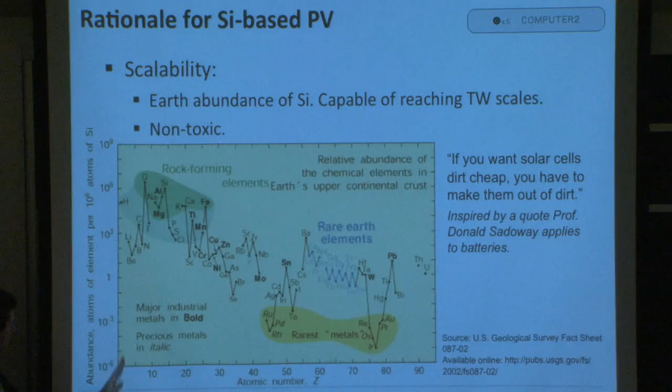One is scalability. If you look at the elemental abundance, this is on the vertical axis, abundance atoms of the element per 10 to the 6 atoms of silicon. The reason everything is normalized to silicon is because there's quite a lot of it in the Earth's crust.

As you can see, it's the second most abundant element in the Earth's crust. It just so happens that out of all the stardust here on the planet, we have a high percentage of silicon, like the moon and many other planets in our solar system, at least the hard ones. Oxygen is the only element with higher natural abundance in the Earth's upper crust than silicon. As we go to higher and higher atomic number, the probability of formation due to subsequent fusion reactions in stars decreases, following almost a power law distribution, as you can see there.

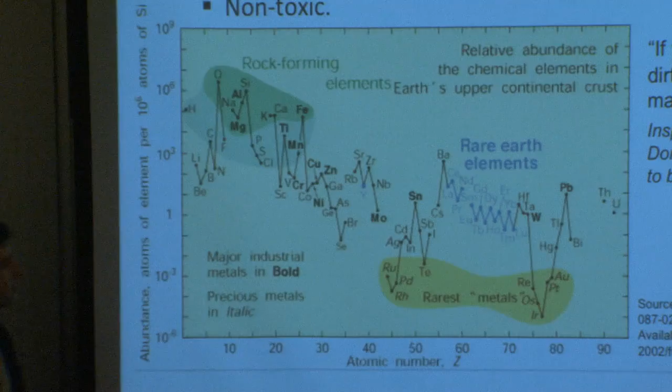So it's scalable. It's present in the Earth in high enough capacity to reach terawatt scales. It's non-toxic. As Don Sadoway likes to say, if you want batteries dirt cheap, you have to make them out of dirt. A similar expression is used in the crystalline silicon community. I believe the quote from 1366 is, 'It's not only good for the planet, it is the planet.'

Variety of riffs off of this particular chart. But from a technological point of view, why did silicon evolve to the point where it is today? It forms a very tenacious surface oxide. If you were to expose a piece of pure silicon to air, the surface oxide that forms is very strong, very resistant, and very dense.

Unlike some materials that corrode when exposed to atmosphere, silicon oxidizes maybe the first few tens or hundreds of angstroms, and then it peters out. It's a diffusion-limited oxide growth mechanism that eventually stabilizes at a very thin but very dense and very protective oxide layer. So the risk of a silicon wafer degrading inside a solar module is very low.

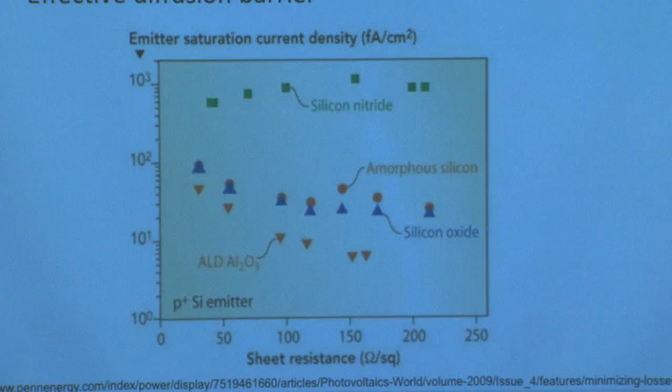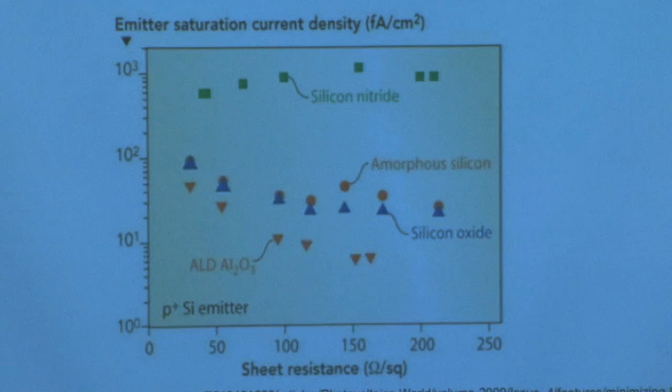That oxide layer, from an electrical point of view, is very passivating. As we studied, those interface states, those surface states at the surface of a semiconductor, can be reduced or minimized by the presence of certain passivating layers. It just so happens that by the benevolence of nature, silicon oxide, shown in these blue triangles, has a very low surface recombination velocity, passivates the surface very well, and results in high-performing devices. In this particular case, they're plotting emitter saturation current density in femtoamps per centimeter squared, which is very low, versus sheet resistance—essentially the dopant concentration in the emitter.

So they're looking at how the passivation quality changes as a function of dopant density. Silicon oxide works pretty well, and it's an effective diffusion barrier. And probably most significantly, those are maybe a looking-forward rationale, one technological or scientific rationale.

As far as the field is concerned, as far as the engineering community is concerned, silicon has a lot of momentum. It's the most common semiconductor material. Silicon and germanium were both purified more or less around the same decades, but because silicon has a wider band gap, you have lower thermal carrier concentration, lower intrinsic carrier concentration. Folks were able to make transistors and devices with lower noise out of silicon as opposed to germanium, and silicon technology really took off. In terms of the PV industry, it benefited a lot by that cross-pollination—many technologies came in from the integrated circuits industry to assist or give a boost to the PV industry.

This number is a little outdated. It's now about $100 billion. Hard to keep up with things growing at 68% a year.

Technology acceptance results in lower interest rates. So if you have a technology that is well accepted by the market, you go to a bank and say, hey, I want to install some of those things. And the bank says, what are those things? You say, oh, hundreds of thousands of them have been installed already. It's okay, it's a proven technology. The bank says, okay, I'll lower your interest rate. That means you pay less money on interest, your capital is cheaper, it works better in your favor. And the opposite is true with an entirely new technology that's unproven.

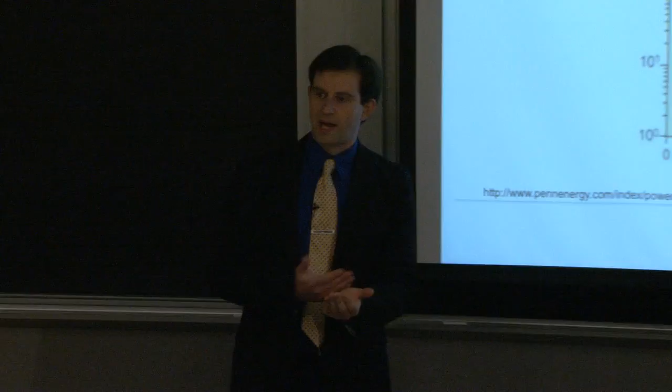So that's really summing up why silicon: momentum, forward motion if you will, some inherent intrinsic technological advantages, some of which are listed here, and scalability. To get back to the technological advantages, it's important to recognize what they are so that when you're thinking of a new material, you can cross-check and say, do I have these or not? If I don't have them, it's not the end of the world—you might have other advantages that overcome the ones silicon doesn't have. Let's add some more into this list.

Just stream of consciousness: silicon has a very high refractive index near the band gap edge. So near the band gap edge, it's absorbing light less efficiently—it has a larger attenuation length of the light, a smaller optical absorption coefficient as you approach the band gap. So silicon absorbs poorly in the infrared because it's an indirect band gap semiconductor, but it also has a very large real component of the refractive index. Does anybody remember what that refers to? Real component of refractive index from lesson number 2—what does that dictate?

Reflection, exactly. So if I were to tailor an index of refraction grading on the front side of my device, I allow the light to be absorbed efficiently; on the back side, I can put a very large index of refraction mismatch so that the light bounces back. In other words, light trapping in silicon is benefited by the fact that you have this awesome reflection capability. The refractive index is around 3.6, the real component, in the infrared at around 1070 nanometers. Which means that if you design your cell right, you can get an extension of the optical path length by a factor of 50 over the thickness. So if your thickness of the device is D, the optical path length can be increased up to about 50D, and that's a result of this great reflectance.

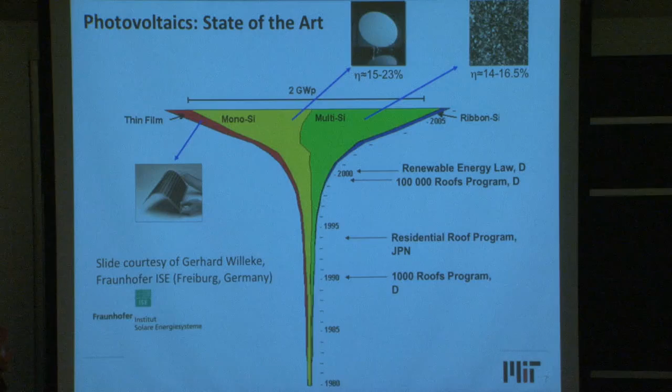In the earlier days, let's pick 1985, the market was split about a third between thin films (amorphous silicon), monocrystalline silicon, and a material called multicrystalline silicon. Now let's go piece by piece. What is monocrystalline silicon, multicrystalline silicon, and thin films?

Thin films are materials usually between a few hundred nanometers up to about 3, maybe 5 microns thick. To give you a size perspective, your hair is about 50 microns in diameter, so we're talking about 1/50th the width of your hair. That's the active absorber layer.

And of course, the plastics and encapsulants and everything else that go around them make it a bit thicker. But the absorber layer is very thin, so you're not spending much on it. It absorbs light very efficiently, has a very large absorption coefficient, and is able to absorb photons efficiently.

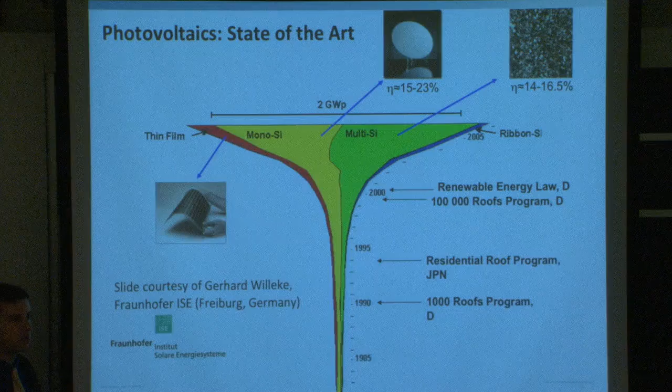Crystalline silicon, on the other hand, does not absorb light as well as many thin film materials, so we need about 1 to 2 orders of magnitude thicker substrates. Crystalline silicon substrates today in commercial manufacturing are typically between 160 to 190 microns, with an average around 170, 180 — about 4 times the thickness of your hair.

Monocrystalline silicon and multi — let's talk about the difference. Folks are probably familiar seeing pictures, at least something like this. This right here is an example of a Czochralski silicon wafer, used or appropriate for integrated circuit work. I'll pass this around so folks can get a sense — this is an example of a monocrystalline silicon wafer for the integrated circuits industry.

Let's analyze it in a little more detail. The front side surface is polished — nicely polished, to somewhere in the order of a few nanometers mean surface roughness, using a chemical mechanical polishing mechanism. The thickness is around 700 or 675 microns, somewhere in that range.

It's a very, very thick wafer. The objective is not to break it. If you're making an integrated circuit, this entire wafer could be worth a few tens or hundreds of thousands of dollars by the end of the processing sequence, so if one of these breaks, that's an awful lot of revenue the company is losing.

So the substrate is thick because they don't want it to break. Silicon is brittle at room temperature. If you were to manufacture a solar cell out of this, you could, but it'd be very expensive.

The chemical mechanical polishing used to flatten the surface costs a lot of money and is very time intensive. The thickness of the silicon is above and beyond what is necessary to absorb light well. If anything, increasing the thickness just increases your emitter saturation current, since you have a higher recombination current driven by bulk recombination. You have more recombination centers because of the greater thickness, and it drives a larger diffusion current from the emitter into the base. So making it this thick really doesn't make much sense.

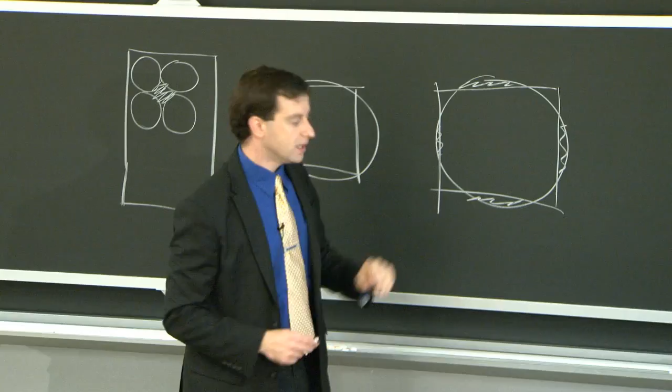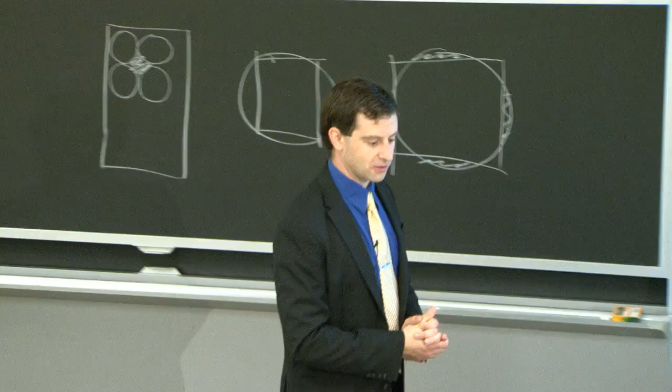So the idea is to cut it out of the same ingot as that one right there, but make it thinner, on the order of 170 microns thick, and chop off part of the edge. How much you chop off depends on the dynamic pricing of silicon versus module materials and installation, and whether you can sell the module if there's a certain threshold of performance it needs to reach. Because obviously, if you have a bunch of dead space in here, you're not producing power out of that. So if somebody wants a module that's more efficient, you might want to increase the packing density.

So that's monocrystalline silicon. Multicrystalline silicon—let's put it this way for now. We'll describe how multicrystalline silicon is made. But for now, I'm going to say that multicrystalline silicon is a crystalline silicon variety that is comprised of many small grains.

So if you look at a multicrystalline silicon wafer, something like this—let's say this is a perfect example right here—if you look at a multicrystalline silicon wafer, you can see it looks nice here, maybe. That's probably an OK view of it. You can see individual grains if you look closely at it, and those are grains of crystalline material that are joined by grain boundaries.

So the grain orientation in one region might be pointing in this direction, while the grain orientation in the neighboring region points like that, and they come together at a grain boundary. When we have polycrystalline materials like this, it's generally indicative of some faster growth that didn't allow for a nice homogeneous single crystal material to evolve. And that's indeed what happens during the multicrystalline silicon ingot growth—it occurs under a slightly modified growth condition than, say, that beautiful single crystalline piece over there.

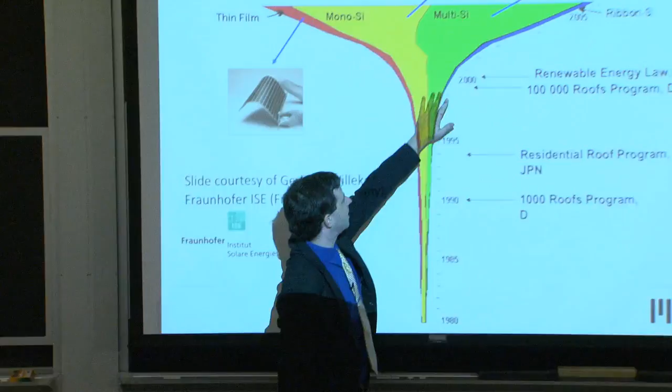And we'll explain how those are made in a second. So those are the technologies in general, the base absorber materials. Then there's ribbon silicon, which is a really small fraction of total production and decreasing. But at one time, ribbon silicon was viewed as the up-and-coming technology. Still today, there are about 20 startup companies in the US working on some aspect of this, and probably a dozen more around the world.

I had a question about multi. I've heard of multi and micro and poly - are they just different grain sizes? Sort of. Multicrystalline silicon is a polycrystalline silicon material. The definition is that the average grain size is about 1 centimeter squared or larger, and that's where multicrystalline came about. Polycrystalline silicon in the silicon community has a very specific meaning - usually a plasma-enhanced chemical vapor deposited layer of silicon with 1 to 5 micron diameter grains, so very small grained material, about 1/50th to 1/10th the width of your hair. To distinguish it from that poorly-performing small grained material, one calls this multicrystalline silicon.

Is there microcrystalline? There is also microcrystalline silicon, and it's actually at the phase transition between amorphous and polycrystalline silicon. As you go from an amorphous material, increasing the temperature of growth or other parameters during deposition, as you begin to evolve into a crystalline material, you transition through this microcrystalline regime, which is a bit of a hybrid, with some regions amorphous and other regions crystalline.

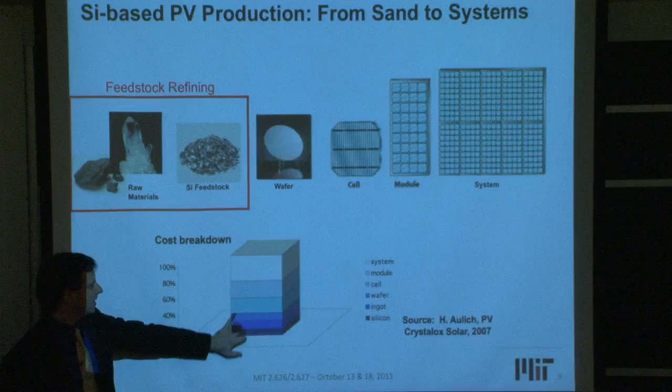OK, let's talk about feedstock refining. We're going to start the silicon value chain from the raw materials and work our way all the way to the final module. We'll start with the feedstocks themselves. Down here is a rough cost breakdown - think of wafer, cell, module as being like a third of the total module cost, with balance of system components beyond that. So we'll start from our feedstocks and raw materials in the ground, wind up with systems on the roof, and walk through each step of the current manufacturing process.

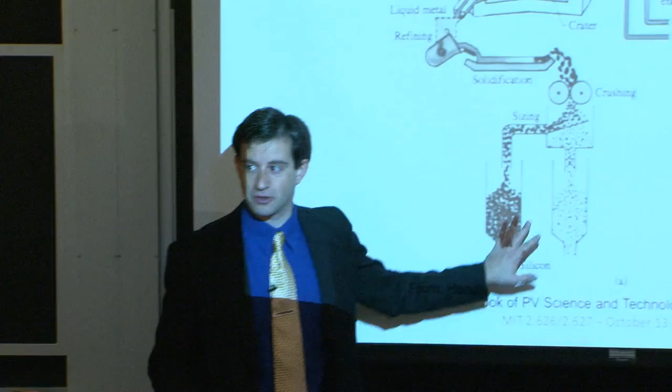So raw materials - shown here is quartz and coal for a very good reason. The way feedstock refining occurs at the first stage is to take oxidized silicon, silicon dioxide, quartz, and reduce it to silicon - silicon zero, unoxidized silicon, also called silicon metal. It's called a metal because it's very low resistivity, which is because it has a very high impurity content still. The purity of this material is around 99.9% pure. That sounds high, but in terms of parts per million of impurities, we have further refining steps to do after this.

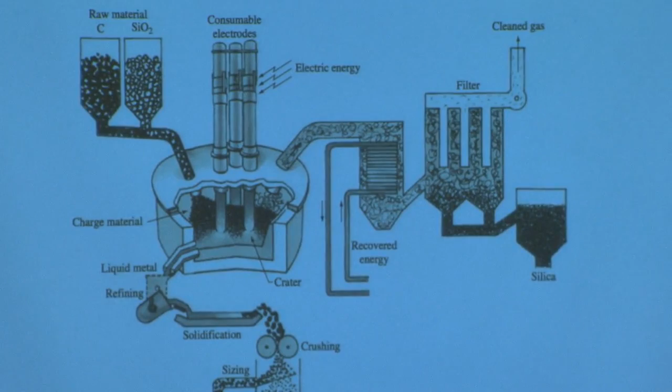So let's walk through this. We start with the raw materials in the upper left - raw material inputs, carbon and SiO2. The SiO2 form is usually quartz, which could be high purity pegmatite, or hydrothermal quartz, higher purity varieties of quartz. You could even use a metamorphic quartzite material.

Let me explain. Some of the highest purity materials come from veins of magma that flowed up and then phase separated during millennia. Some of the lowest purity quartz comes from sand - essentially crushed rock that made its way into a beach-like environment, and then rock was deposited on top of that as pressure was increased.

And this whole mixture of mica, feldspar, and quartz got pushed together and formed a solid block. That would be your metamorphic quartz material. And so you'd have a much higher impurity content in the metamorphic quartz than you would in, say, a high purity pegmatite or hydrothermal quartz.

Regardless, depending on the feedstock source of the quartz, there are people who study this, believe it or not. There are entire departments dedicated to mining quartz and figuring out where the different veins of the highest purity quartz are, where you get them from.

That's the SiO2 input. And the C input over here on the left-hand side, carbon. So typically what is used in the PV industry is either a fast-growing wood source, like eucalyptus or southern pine. Northern pine tends to be slower growing, but eucalyptus and southern pine both tend to be fairly fast growing. You can tell by the spacing in the rings if you chop the tree down and do a cross-section. Or coal, so carbon, essentially.

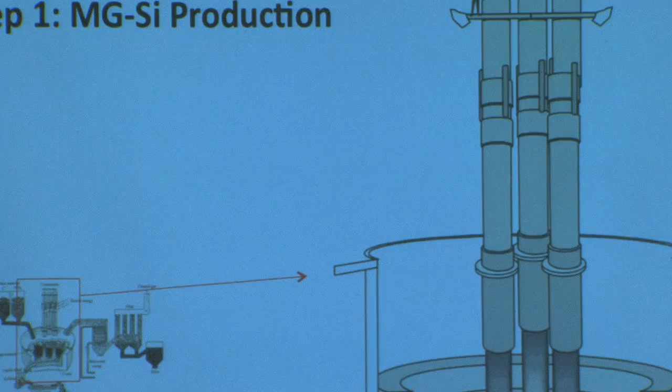And the two react inside of this furnace right here. And this furnace, just to give you a sense of scale, here's a human being. This is the furnace. It's just about 5 stories tall, 12 meters in diameter. It's a big creature. This furnace right here is what is producing the reduced silicon.

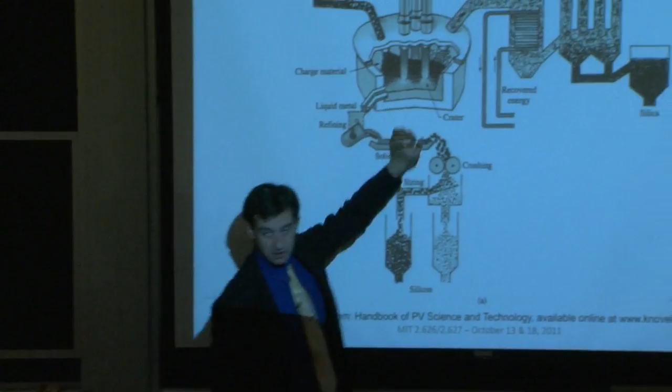What's happening is these feedstock chunks are being thrown in at the top, and there's an arc going between the electrodes, usually some carbon-bearing material, and a base contact. That arc creates a very high temperature, something on the order of up to 2,000 degrees Celsius near the arc. And the temperature decreases as you go further away. Up near the top, it might be even below the melting temperature of silicon, somewhere around 1,200 degrees.

So this is an extremely inhomogeneous, messy system, this metallurgical grade silicon refining furnace, this arc furnace, also called a carbothermic reduction furnace. Very busy place, lots going on, extremely inhomogeneous if you were to take a cross section, also in terms of temperature and in terms of the chemical states of the different constituent species.

But the general reaction that happens is the carbon would much rather bond to the oxygen than silicon. And so the carbon steals the oxygen from the silicon and reduces the silicon to silicon metal. And CO2 is released. We'll get to that in a second. Flag that, put an asterisk next to it. We'll come back to that in a sec.

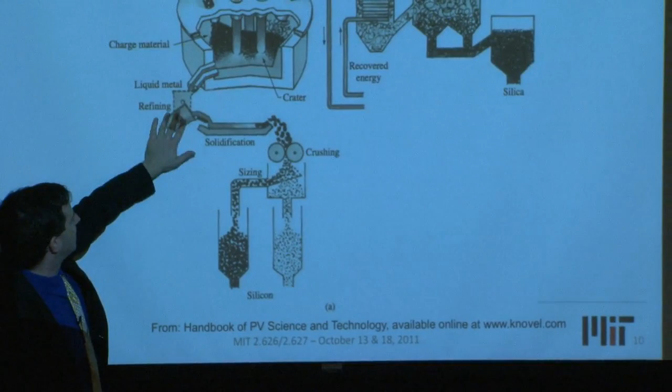Other byproducts of this reaction — this is the liquid silicon metal coming out here at the bottom. It's essentially liquid molten silicon. Reduced, so silicon zero, not a silicon oxide. Reduced silicon metal. And then finally it's poured into these buckets, also called ladles, and solidified, crushed up to size, and then distributed at the end.

Other byproducts coming out of this reaction include this liquid silicon up here. It's very high temperature, and there are gases and a lot of oxygen because of the reduction process. So silica, or SiO gas, can be produced. And silica gas can begin aggregating and forming very small particles, almost like shards of silicon oxide material. These can be on the order of 1 to 5 microns and very rough and jaggedy around the edges.

Now, who here has studied public health and knows anything about PM1 or PM1.5 denominations? Do they ring a bell? What are those, Ashley? It's the size of particles that can get stuck in your lungs.

Exactly, right. So PM1 or PM1.5 would refer to the micron diameter, 1 or 1.5 micron diameter particle that would get stuck in the alveoli and result eventually in edema, or probably more of water filling up in the lungs as a result of the body trying to expunge these. And because they're jaggedy and pointy, they get stuck in there and they don't come out. Eventually people can even asphyxiate as a result.

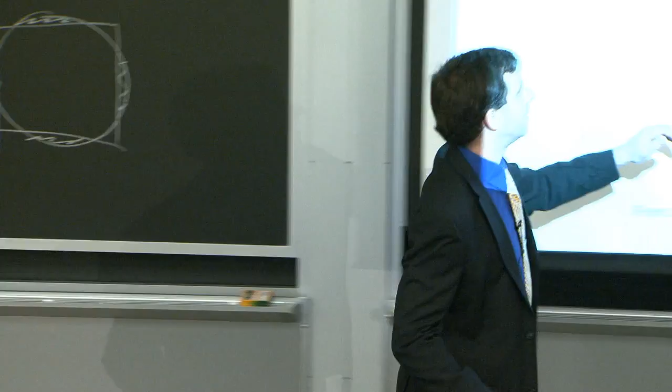So in the past, when we had these big smokestacks sticking on top of these metallurgical grade silicon refineries that would just spew the silica dust into the air, the folks downstream would be affected. This actually did happen to some degree in, for example, Kristiansand in Norway. As a result, the refineries began putting in filters over here to prevent the silica dust from getting thrown and spewed out into the atmosphere.

And the filters are a very interesting contraption. A lot of work went into designing them just right to allow the air to go out, but the particulate matter to stay behind.

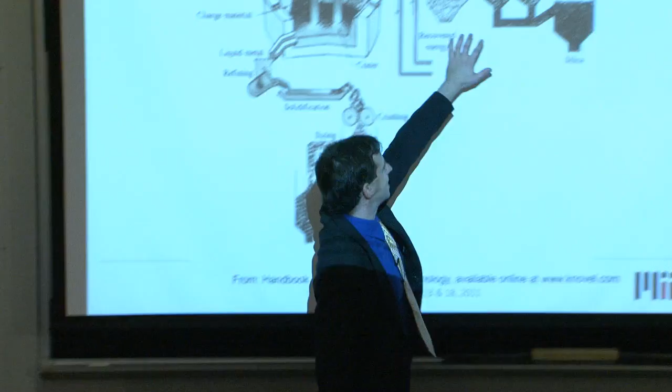And once every delta T, maybe on the order of an hour or so, the airflow direction inverts, and all of the dust comes crashing down to the bottom and gets collected inside of here. It's kind of like pushing air through a sock in the opposite direction, and all the dust comes out through the bottom. You collect it, and it's sold.

It might be used for absorbing in the footwear industry, I don't know, but I know that the majority goes to the cement industry. So depending on the market rates of silicon here at the bottom, metallurgical grade silicon, versus what the cement industry is willing to pay, you might tune your process to optimize for one industry or another.

So this is to say that early on in refining processes, you're serving multiple industries with one plant, and volatility of pricing is affected in part by what those other industries are doing, what the demand there is. Something to be aware of.

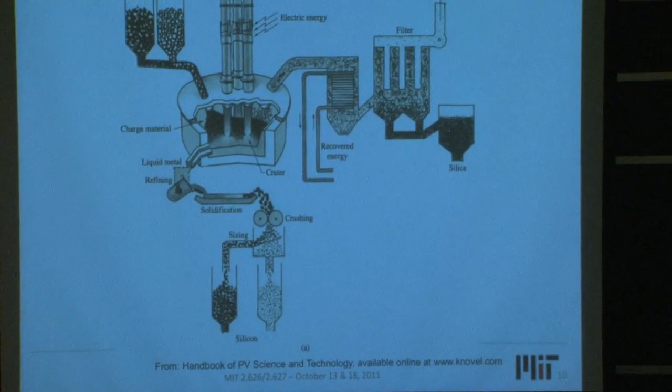Let's come back to the CO2 real quick that's being emitted. That's one of the byproducts of the reaction. In terms of total CO2 content from production of solar cells, the CO2 produced during the reduction process is a small percentage - I think something under 5 or 10%, the number I pull out of my head.

It's a small percentage of the total CO2 emitted during solar cell manufacturing because the electricity that goes into producing the rest of the solar cells, coming from fossil fuel-based sources, comprises the majority of CO2 emissions during fabrication of these devices. The electricity used to run these electrodes, for instance, to melt this silicon byproduct or to gasify it in the subsequent reactions - that is the majority of the CO2 coming out of the process.

Any questions so far about this? They're fun plants to see. We don't have too many of them in the US.

Majority of these carbothermic reduction furnaces are either in China or Norway. Norway has a lot of cheap hydropower, so the hydro plant is usually only a few tens of kilometers away from the refinery. If you go to, say, Porsgrunn in Norway, where they have a number of these plants, you'll see not only silicon being refined there, but also magnesium, other elements, aluminum being smelted in the same peninsula, the same industrial park.

China, you said? The reduction process, this carbothermic reduction process, the majority of it happens, say, in places like Norway or China - places that have cheap electricity.

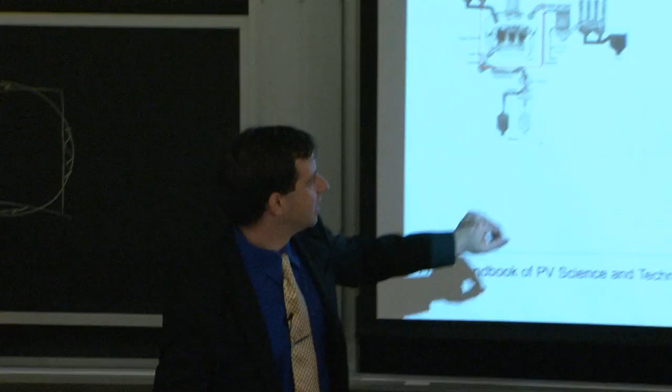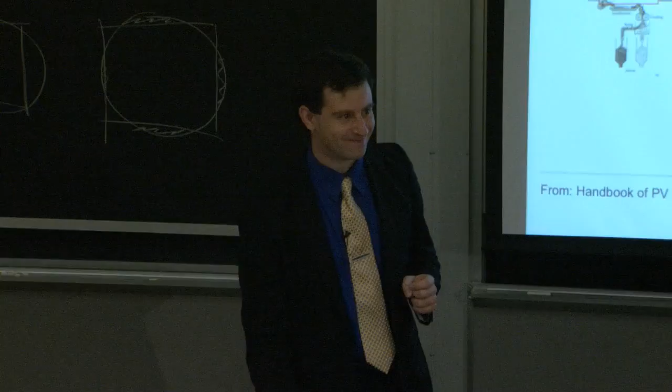We know the energy intensity of the solar panel itself, but specifically what fraction comes from the MGSI refining, I'd rather not pull something out of my head. Any other questions? OK.

So somewhere in the order of 2 million metric tons of metallurgical grade silicon are produced annually. Probably somewhere in the order of 10% of that is destined for the PV industry. The remainder gets split among a variety of different industries. So what I'm talking about here when I say metallurgical grade silicon, I'm referring to this stuff coming out - it has about 99 or 99.9% purity, and it gets used in a variety of industries.

So those industries are the PV industry, and we'll explain how the rest of the refining happens, and the integrated circuits industry - that's the wafer that just went around. It's made its way back up here.

A pet peeve of mine is hearing silicon and silicone used interchangeably. Silicon is an element on the periodic table, the element that comprises this wafer. Silicone, on the other hand, isn't exactly organometallic, since silicon isn't a metal, but it's a molecule comprised of carbon atoms and silicon, with silicon in the middle and carbon on the sides. That's used as a caulking or sealing agent in showers or in plumbing around windows. It tends to be very flexible, compliant, yet impermeable, preventing the inflow of gases.

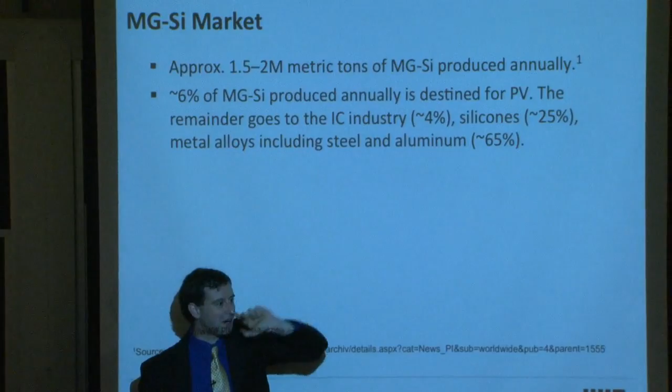So silicones there. Metal alloys, including steel and aluminum - why would you use silicon there? Has anyone played with pure aluminum? Highly refined, ultra-high purity, say 5 nines or 6 nines? It's really flexible - you can dent it with your fingernail, and it wouldn't make very great boxes. So we need it to be stronger and scratch resistant. We add additives into the aluminum, silicon being one of them, that increase the strength of the aluminum, essentially preventing plasticity or dislocation flow into the material. That's more or less how metallurgical grade silicon, also called MGSI, as shown at the top, is distributed worldwide, and that's the current production.

Now let me ask another question. Steel and aluminum - where are those used the most? What industry uses steel and aluminum the most? Construction industry, automotive industry. How fast are those growing annually? Let's estimate it from worldwide GDP growth. US is around 1%, China 8%. Let's pick a number in between, say 4 or 5% worldwide.

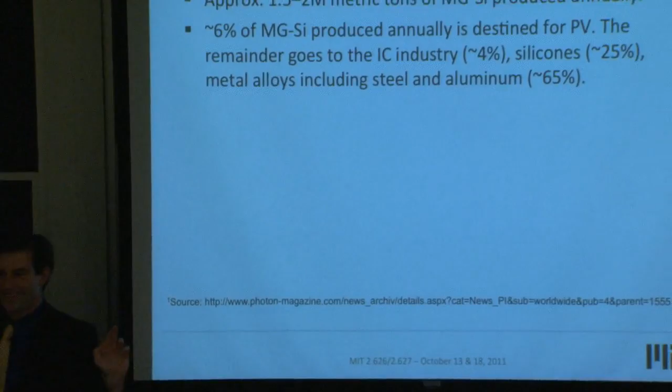Silicone's probably on that order. How about the PV industry - how fast is it growing right now? It's a volatile year right now, but historically it's been around 40 to 60% a year. So where do you think the price pressure on metallurgical grade silicon is going to come from? It's going to come from PV. It's a small fraction of the pie right now, but it's growing fast. Something to keep in mind.

So let me talk about going from metallurgical grade silicon, about 2 nines to 3 nines pure - 2 nines meaning 99%, 3 nines meaning 99.9% pure - to silicon that we can use for solar cells, which typically has to be about 6 nines pure. This is called the Siemens process, purification through gaseous distillation, and that's the method currently used to make most of our silicon.

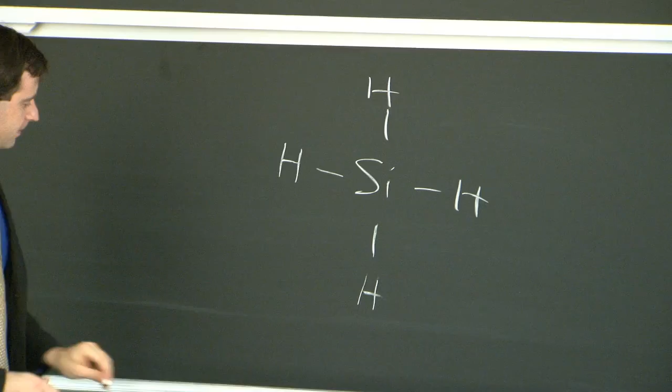Most of the silane is used for polysilicon. The gas has to be converted back into a solid, and that's where the Siemens process is used. You have a current passing through some seed material, and the gas is cracked onto that seed. You form these rods, which are then cracked into chunks, and the chunks are loaded into ingot crucibles.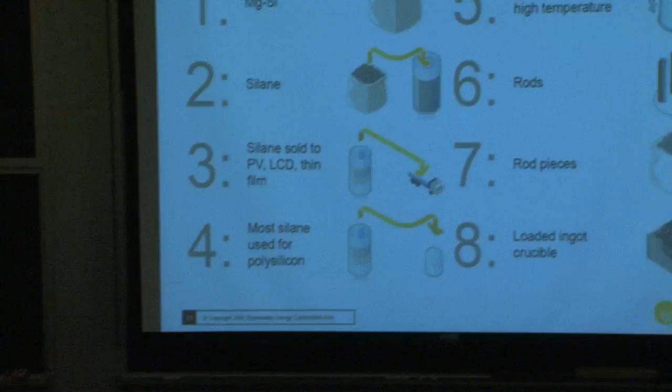So the silane gas is shipped as a gas in trucks? Sure. Or on rails?

It's pyrophoric, as you could guess from just glancing at this chemical structure. It's highly reactive. Pyrophoric means it can combust at room temperature, it can catch on fire, meaning there are more stable compounds that can form when you react this gas with air. During the early days of silane development, folks didn't know much about it.

Some of the earliest research was done here at MIT. They would fill an evacuated chamber with silane gas and spark it, and nothing would happen. Spark a second time, nothing. Spark a third time, boom. They'd say, okay, that's the critical limit, such and such amount. They'd keep increasing the amount until it went boom. So they'd repeat the experiment, since they're good scientists. They'd repeat it, and at low concentrations, click, boom. Huh, that's strange, that was much lower this time. Let's repeat it one more time: click, click, click, click, click, click, click, click, click, boom.

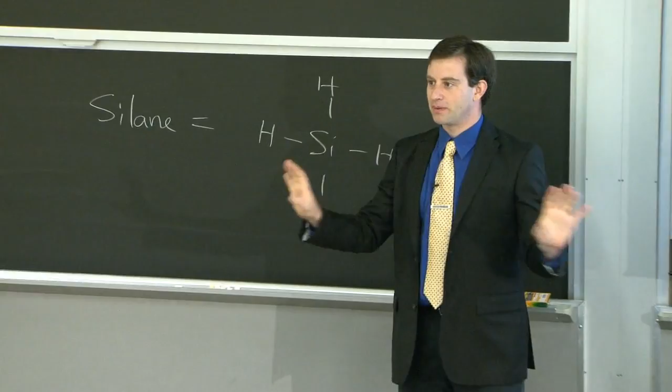All right, we don't really understand this gas, but we're going to say it's really dangerous. So we're going to have little warning bells that detect the silane gas if it's leaking, and tell people to get out of the building if it starts leaking.

It's also toxic for humans, by the way. Very small, dilute concentrations can kill you. So only 3 buildings on campus, to my knowledge, are set up with the proper safety equipment to use silane gas in the laboratory: building 13, which is the material science building, and then MTL and related.

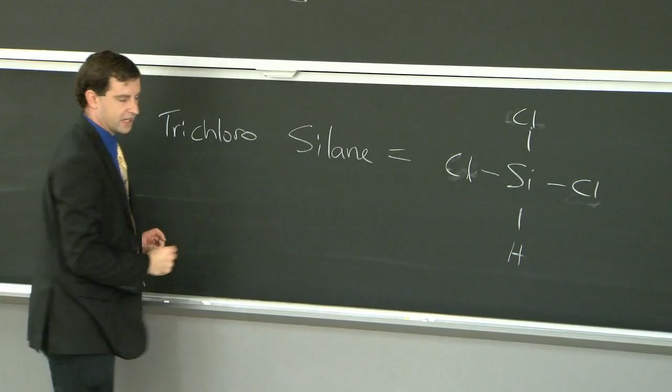So we have this gas, extremely pyrophoric. There are variants thereof. You can replace some of the hydrogens with chlorine, like this, and now you have trichlorosilane, all one word. I've just replaced 3 of my hydrogens with chlorine, and now I have a different molecule, still silicon-bearing, still very reactive, but now reactive at different temperatures. I can modify my process by substituting out some of the hydrogens for chlorines.

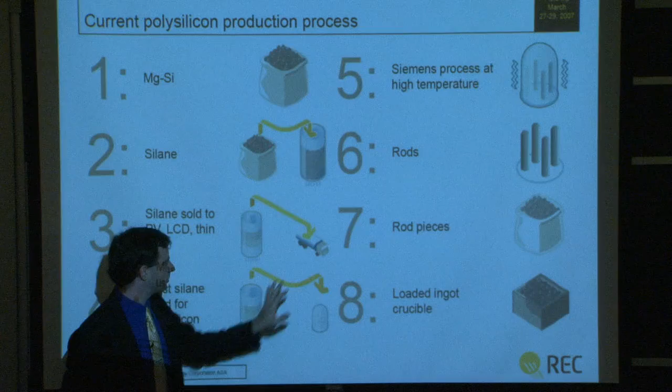So we have the silane gas, or trichlorosilane, or the variants thereof, loaded onto some transportation vehicle that is very safe, leak-proof, and preventing accidents on the road, to deliver it to where it is going to be consumed, which are these so-called polysilicon or Siemens reactors, as shown here. Let me go back one step. We're going to start from the very top of the process and move all the way down, showing you what the manufacturing equipment looks like at each step.

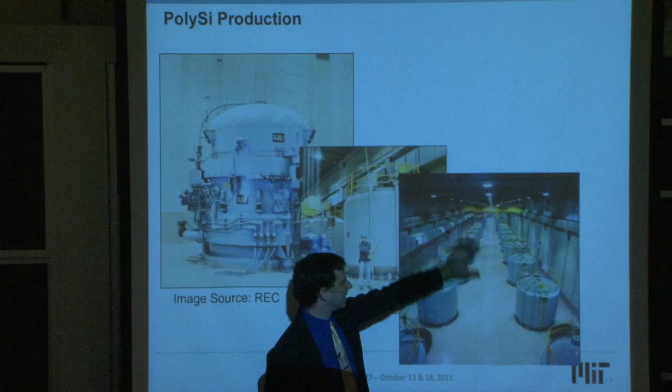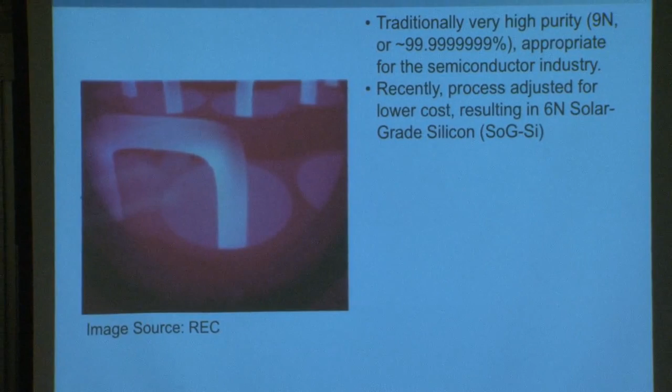The polysilicon production, this is a Siemens reactor. It's much smaller in comparison to the metallurgical grade silicon furnace, much smaller than the carbothermic reduction furnace. Here we have a small human next to the small contraption, and here's a series of them lined up, almost like little pods. Inside the furnace, you have these rods passing current and heating up, and the silicon is cracking onto the rods. So we wind up with 6 9s, usually called 6N solar grade silicon, as a result of this process. We could also go up to even 9 9s using the Siemens process. It can be very, very pure, depending on how fast you grow, and what the purity of your silane gas is.

What is cracking? Like, what does that mean? So what it means is this gas molecule comes in, sees a solid surface. The central atom, the silicon atom, gets deposited onto the surface, becomes an adatom, which means it's a surface atom, it's scuttling around. And the remaining elements within this molecule are then free to move away as a gas.

So you've broken those bonds. Yes, effectively you've added the core constituent of this molecule onto the surface. It's joined the collective, if you will. And in this manner, the diameter of those rods grows with time.

So what I'm going to do is pass around an example of a chunk coming from this Siemens rod. Be very gentle with it, please.

On the outside, you can see a corrugated, rough, cauliflower-like structure. That's because you're optimizing for deposition speed, not for beauty of the surface. You don't really care how flat it is, unless you're trying to grow a very specific type of material called float zone, which we'll get to in a second.

But in general, if you're just trying to crack it up and break it into a smaller piece, a chunk like this, and throw it into a big ingot furnace, it doesn't really matter what the surface looks like. On the inside, it's pretty dense silicon. And if you look very carefully, right in the middle, you can see the rod, the initial seeding rod. It's a slightly different color. So I'll pass these around, please be gentle.

One of the biggest issues with this feedstock refining process is that there are very large plants and long lead times. This is a plant construction going on right now, you can see. Typical lead times are between 18 and 24 months. That's a long time between when the board says, yes, we will create new silicon refining capacity, and product starts to roll off the production line into customers' hands. It's a long time. And what this results in are drastic oversupply and undersupply conditions in the market.

So the silicon feedstock price goes very high during periods of undersupply and very low in periods of oversupply. And we're in an oversupply condition right now. Let me quantify this. 5 years ago, maybe 4 years ago, if you went to the spot market, you could pay $100 to $500 per kilogram of silicon.

That material that was just right there, I bet one of you would put it into your bag and run away out the door right now and be able to go to Mexico. Now, the polysilicon prices are much, much lower in the spot market, somewhere in the order of $30 to $50 per kilogram, about an order of magnitude lower.

Isn't lower cost silicon better for the PV industry though? As a customer, most definitely it is good for you. As an installer, it is most definitely good for you. As a polysilicon producer who wants to be a sustained industry presence, it's not good for you. So this wide oscillation between fat cat and scrawny is not very good for any industry. It's unpredictable and it causes some players to drop out.

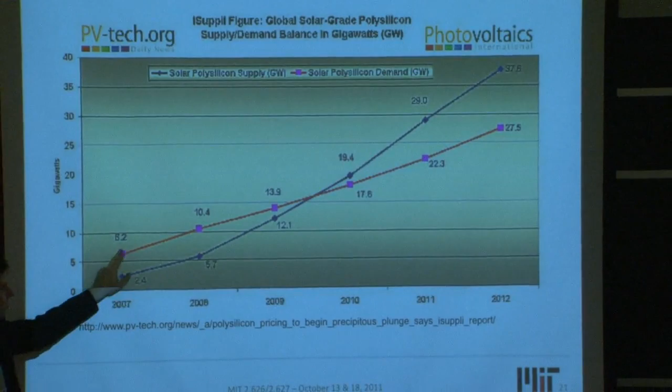Here's supply and demand, demand being the red, the supply being the blue. You can see how the undersupply condition of the mid-2000s really led to our current condition.

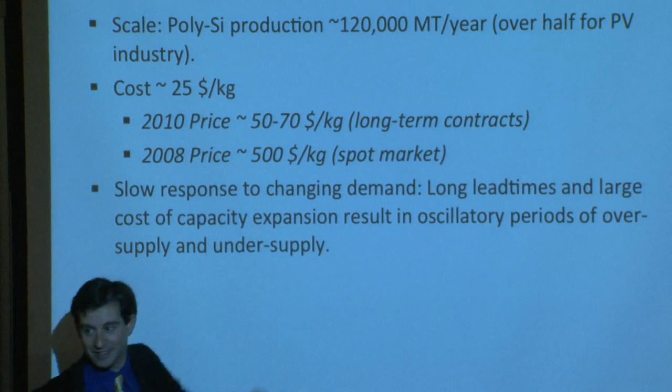So, fluidized bed reactor and upgraded metallurgical grade silicon. Let's talk about each of those in turn.

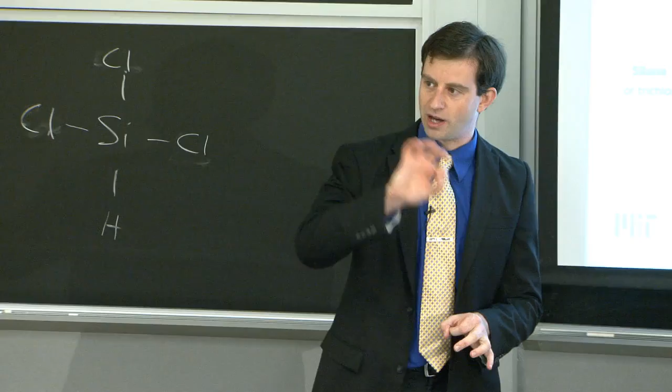What the fluidized bed reactor folks realized was, if we're depositing on a rod, our surface area to volume ratio is going to be very small. Think of it this way: if we had a sphere, that would be the quintessential example where you'd have a very large surface area to volume ratio. If we had a plate, we would also have a very large surface area to volume ratio. In the prior condition, with the rod, you really can't deposit that quickly. So what these folks decided was, we're going to introduce small silicon granules into this vessel, into this evacuated chamber.

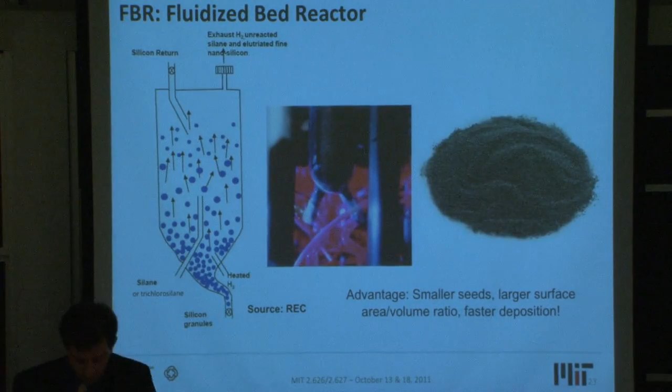Here's the evacuated chamber right here. We're going to flow silane gas into the system. The smaller particles are going to go higher up because of this flow of gas coming from the bottom, and those will grow and eventually settle down here where we can extract them from the bottom. And so we'll wind up with these beautiful little silicon granules.

These ones shown right here, which I'll pass around as well, are coming from a fluidized bed reactor. They're nice, beautiful, spherical granules that are grown a lot faster, with a lot more silicon deposited per unit time than through the Siemens process shown there in the back. As a result, the energy intensity is lower and the cost is lower. But it's a very tricky process to nail, to get just right, because you have to get the gas flows right, design the chamber well, and reduce impurity contents. It's a tricky process, and this is being produced right now by only a few companies.

REC has the capability of doing it. MEMC also has the capability of doing this process. By and large, most silicon is coming from the Siemens process still. Both of those companies have the normal refining process too, and that's why they developed this new one—they had these smaller internal projects that were able to develop them.

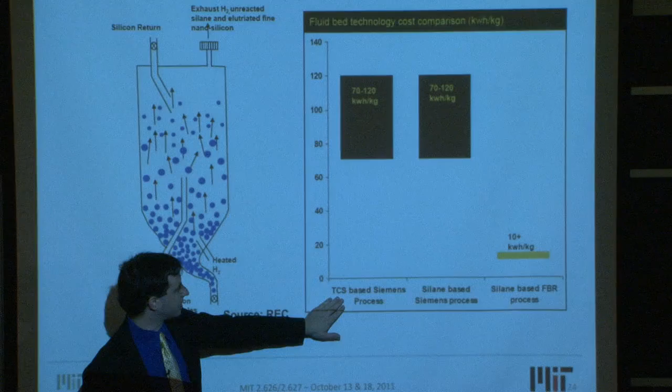So, I was just mentioning the energy intensity. This is the kilowatt hours per kilogram, going back to your question about energy intensity. This is the trichlorosilane-based Siemens process and the silane-based Siemens process—they're more or less comparable in terms of energy intensity. The silane-based fluidized bed reactor process, according to internal REC numbers, which are a little rosy but the trend is correct, is lower, somewhere on the order of magnitude in energy intensity. Cost is lower as well.

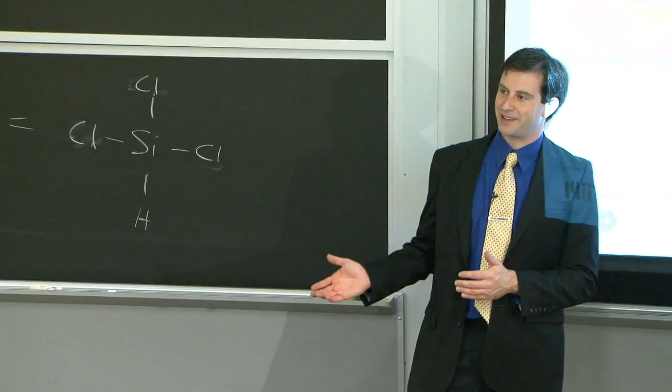So let's move away from the silicon refining by distillation process entirely. Let's leave gaseous distillation aside and ask: what if we were to take this metallurgical grade silicon and, through liquid purification routes, result in high purity silicon? How would we do that? Well, if we turn to other industries—those that smelt aluminum or refine manganese and so forth—we would see a multitude of different options we could borrow: slag refining, leaching, and solidification. Let me walk through them one by one.

Leaching is fairly straightforward. If we put in some acid, for instance, that dissolves the metals but doesn't dissolve the silicon, we could leach the metals out of the material. That's the essence of leaching. You might crush up your material, or in other ways expose the metals or impurities to the acids inside of your system.

Slag refining says: what if we were to introduce some material that could absorb the metals into it? The solubility of the metals would be higher inside of the slag agent than inside of the liquid. Maybe we throw in calcium oxide or yttrium oxide—usually a metal oxide with a very high melting temperature that remains a solid or at least a glassy solid. We pour it on top of our silicon, and it's able to absorb, say, the phosphorus or the boron inside of our silicon, so that we reduce impurity content.

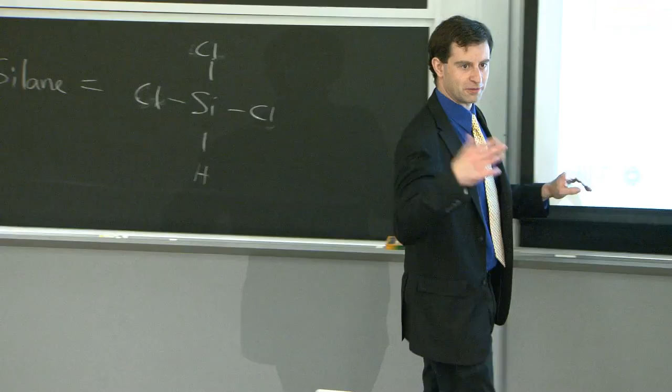And then we can add the phosphorus and boron later intentionally, but to the concentrations we want, not to the exuberantly high concentrations that might be found in nature.

Solidification: during the solidification process, you're taking your molten silicon and solidifying it directionally from the bottom up. Because the solubility of impurities tends to be larger in the liquid than in the solid, it's like dragging a comb through the entire material, dragging out the impurities, concentrating them in the liquid, and leaving more pure silicon behind. Obviously, at the very end, you have this highly concentrated region of impurities.

Then you have to slice off and remove that region. So the solidification process doesn't come without a yield penalty—you still throw away some of your material. So you can't repeat the solidification over and over again. I guess you could, but you'd be losing material every step.

So some combination of these processes here and others, other trickery like low temperature eutectic formation with other elements, for example—some combination of this is used to refine the silicon without creating a gas out of it.

So wafer fabrication: we're now going from feedstock, leaving feedstock behind, and we're going to talk about how you go from the feedstock materials being passed around the room right now into a wafer that you can then manufacture a solar cell device out of, one of these, for instance. So let's talk about wafer fabrication right here.

So again, just to situate ourselves, we've gone from raw materials to silicon feedstock, and now we're going from feedstocks to wafers. Any questions right now before we dive into that?

Question about supply: silicon is very abundant, but are the high purity silica deposits really abundant too? Great question—so the question was, are the high purity silica deposits as abundant as, say, silicon?

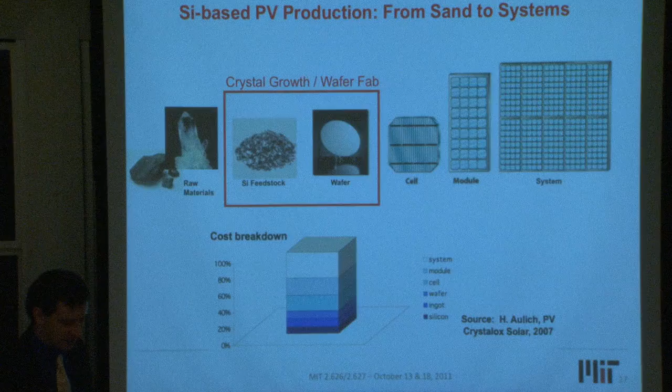Certainly, if you bend over and rub your fingers against the ground, you're probably going to come up with millions of trillions of silicon atoms in your fingernails. Those are not very high purity.

So the highest purity quartz deposits are more rare, and they are sought after. Their locations are known—there's one specific one in Norway, one in North Carolina, and so forth around the world. They're, in a sense, the go-to places. People have adjusted their metallurgical grade silicon refineries and their subsequent downstream process for that particular ore.

Once we run out of it, it's not that the world ends. We just have to adjust for the next feedstock source.

So in principle, there are people looking at a variety of silicon inputs, anything from the dirtier compressed metamorphic quartz that I mentioned, to rice husks, which are silica rich as well, to seashells, which are mostly calcium carbonate, but other things as well.

There was a wide range of ideas when the price of silicon was $500 per kilogram—you had a multitude of ideas. When the price comes back down, people tend to be more conservative.

Is silicon considered a renewable resource? It is not a renewable resource in the sense that once you mine it from the ground, you've mined it from the ground and used it in some way.

The reason it's considered not an issue is because there's so much of it. Not all of it, though, is in the accessible, easy-to-access form—some of the silicon might be bound up within heavily contaminated sources. And that's where...

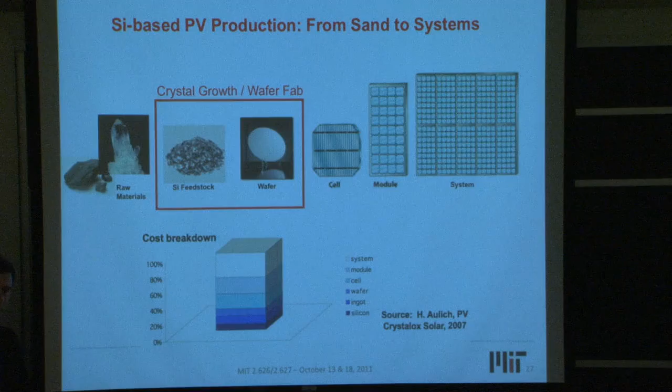All right, wafers. How do we get to these from the raw feedstock materials being passed around the room right now? So, single crystalline silicon ingot growth. Let's walk through that first. How do we get these beautiful ingots? They're about half of the silicon market right now.

The biggest growth method by far is called Czochralski growth, named after the Polish physicist Jan Czochralski. What you do is have a bath of molten silicon, a crucible if you will. This tends to be a circular crucible, rounded at the bottom, usually made of quartz, with heaters on the outside to heat up the molten silicon, the silicon chunks in here.

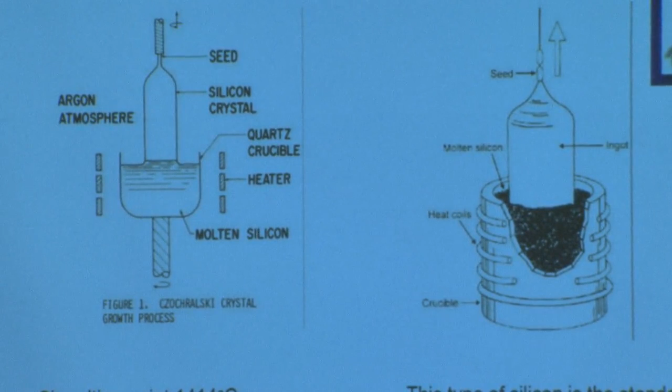Once everything is molten, looking like a big bathtub of silicon, you introduce a small crystalline silicon seed into that molten silicon, and then begin pulling while rotating that seed. The seed is a single crystalline material, and as you introduce it and begin pulling, you start pulling out this single crystalline crystal.

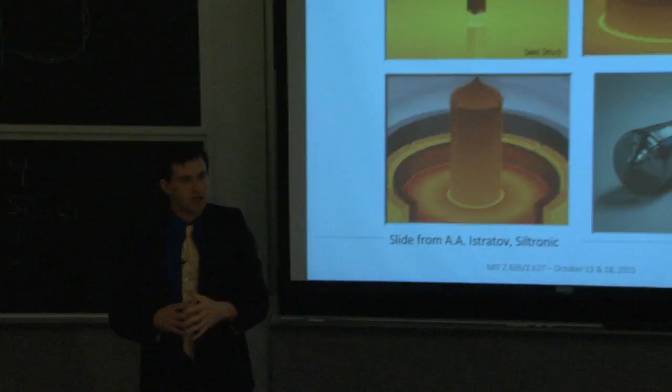It's a thing of beauty. This seed is actually very narrow in diameter, maybe about that big around, and it's able to support an ingot of usually a few tens to hundreds of kilograms in mass underneath it. That's because silicon is very strong, even though it's brittle.

If you weren't to apply a shear force on the silicon but just an axial load, you could support a very large weight underneath it. So the boule of silicon is grown from the bottom, and eventually you wind up with this nice ingot, as shown right there. The art that goes into growing this properly is amazing.

I'll illustrate with one small example of the bigger picture: a lot of effort goes into making these defect-free, quote-unquote, crystals. They're called defect-free because they contain no grain boundaries and no dislocations. They have impurities, they have intrinsic point defects, meaning vacancies or interstitial atoms, but no grain boundaries or dislocations, so they're called defect-free silicon.

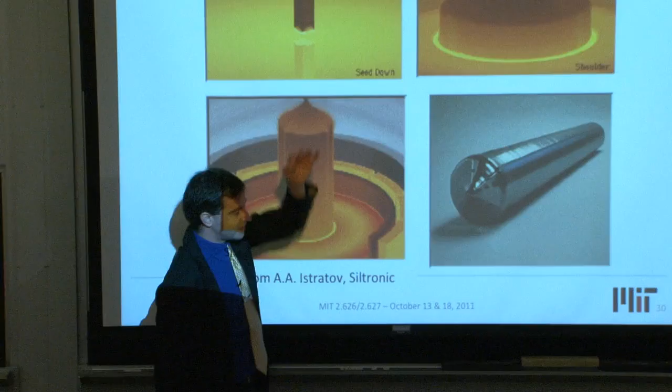You introduce that seed down into the liquid melt. Thermal stress happens because of the shock between the solid silicon seed and encountering the liquid for the first time. So dislocations form, and you have to pull the seed out in such a way, slowly rotating, to make this shoulder.

The shoulder has to be as quick as possible because you don't want to waste material. Everything inside of this shoulder gets thrown away, so that little piece of material gets tossed out. You want the shoulder as narrow and quick as possible to utilize the majority of your ingot, but thick enough that dislocations can propagate all the way to the outside and terminate in the shoulder before propagating into the crystal. That's just one example of the technology that goes into growing these.

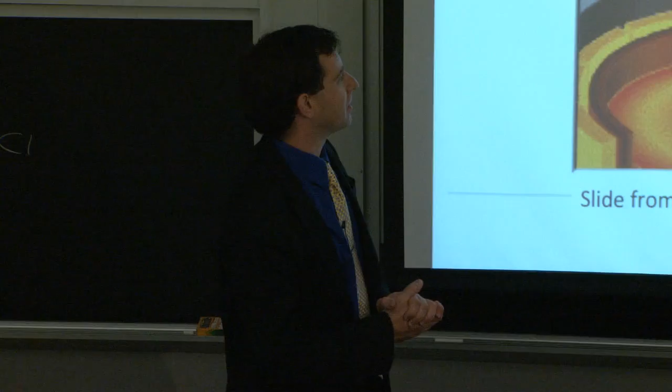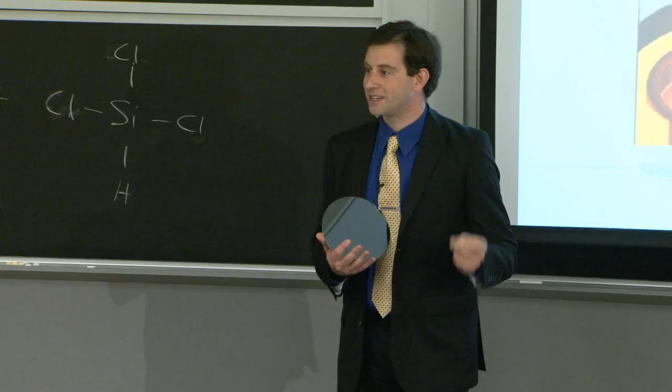Another example: we're a PV industry, we want to make this stuff fast. Whereas in the IC industry you can invest up to a few hundred dollars per gram of silicon and still make a profit selling a computer for $1,000, in the PV industry we can invest at most a few tens of cents per gram of silicon. So we have to make this stuff fast, we can't dilly-dally. You might want to crank up the growth speed, but then you run into issues with defect concentrations, intrinsic point defect concentrations during growth.

I'm illustrating this just to highlight the complexity of the growth process of making these ingots. The latter example is one that the PV industry is facing today. It's actually a hot research topic.

Ashley asked: does the rotation speed just affect the diameter, or does it affect other things? It affects a multitude of things. One is the convective flow within the melt. The liquid flow inside the melt in part determines how much oxygen gets transported from this crucible into the growing crystal. If you suppress that convective flow in the melt, you also suppress oxygen transport, since diffusion is a lot slower than turbulent transport, or Marangoni transport, or convective transport.

I have two questions now. One is, how fast do you rotate it?

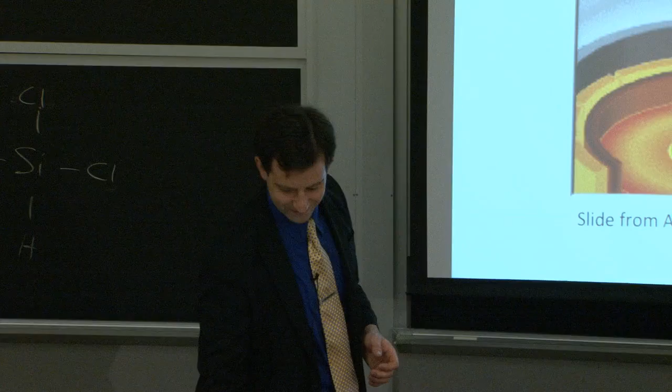And the other is, what then does control the diameter? Because I've heard about 12-inch wafers versus like 18-inch wafers.

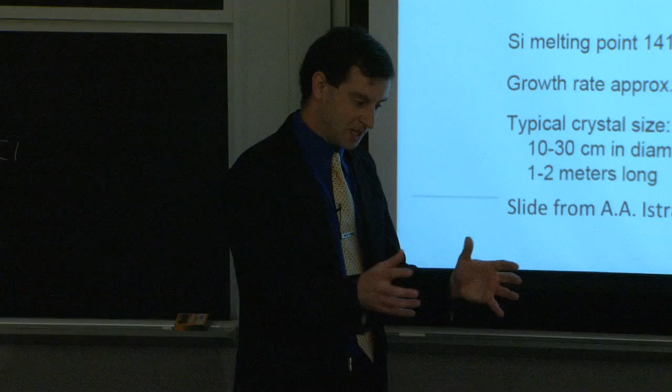Sure. So one of the things that controls diameter is the balance of heat extraction. If you cool something down, especially molten silicon, it will freeze and grow. If you heat it up, it will shrink. So that's one component. The pull speed and how you grow that shoulder, essentially how you heat up the material and how fast you pull at those initial stages, also dictates the diameter.

And you can see in the ingots themselves, they're not perfect. They have a little bit of corrugation, and that's just fluctuations of the temperature of the melt, fluctuations of the heater output, fluctuations of pull speed. Maybe what's pulling this entire contraption is a kind of stepper motor that has a certain granularity to it and results in corrugated edges. It's not perfect, so there will be some adjustment made to the form factor of the edge to get this nice round wafer at the end of the day.

Is the seed rod, does it extend all the way through the ingot or just near the top? The entire ingot becomes patterned or templated by the seed rod. So this entire ingot has the same crystalline orientation as the seed.

And is the seed doped differently than the resulting material? It might be, but I'm not aware that it affects the overall process. It could be one of the critical pieces of the magic sauce that makes it work, but I'm not aware.

How fast does it rotate? Rotation speeds—it's not rotating like this, it's a slow rotation. Let's see, how many radians per second? You could visually see it if you looked at it long enough, yeah. You could, yeah.

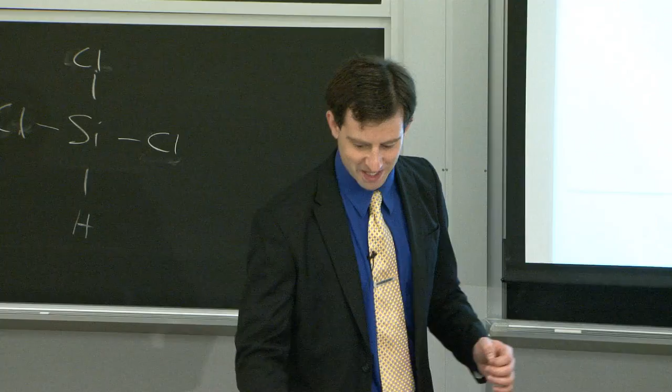So one variant of the single crystalline growth method is called float zone growth, where you take a rod of poly, much like that rod right over there, and you pass an RF coil, a radio frequency coil, next to the rod. What that does is essentially heats up the silicon.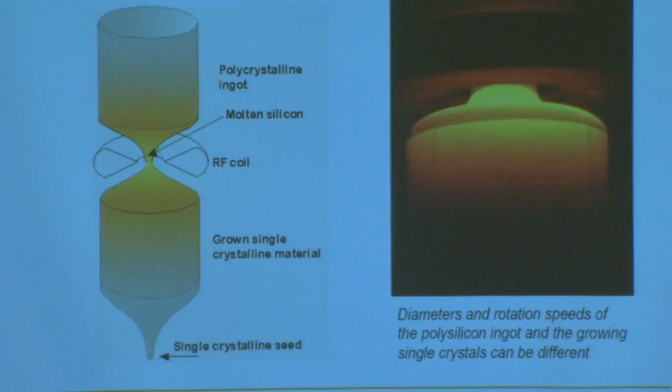If it's doped highly enough, it will melt the silicon locally. Folks have probably heard of fancy high-end stoves that we can only hope to afford in 10 or 15 years. These stoves are inductive heaters, right? They're not resistive heating elements, they're inductive heating elements. And the way that works is you have a radio frequency source that is absorbed by, in the case of the RF heater, I believe a specific type of iron.

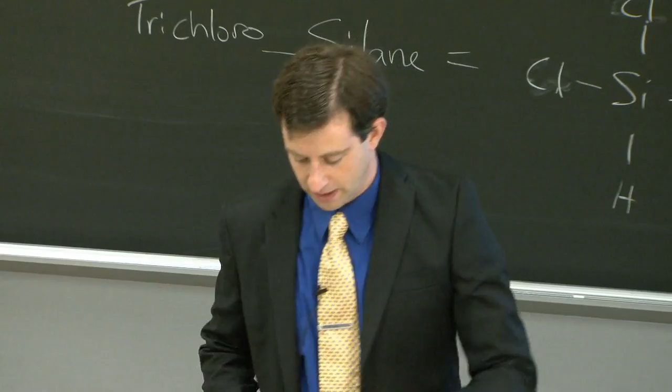The inductive heating furnaces or inductive heating ovens need this. So this RF coil is emitting energy, which is absorbed by the silicon and melting it. You start with the polycrystalline rod coming from the Siemens process. In that case, this rough corrugated material right here won't do—it's too rough for that RF coil to pass over and be a consistent distance away. In the case of float zone growth, you actually have to modify your polysilicon production process, modify the Siemens process so that you get a nice, smooth rod, which you can then pass the RF coil next to and melt.

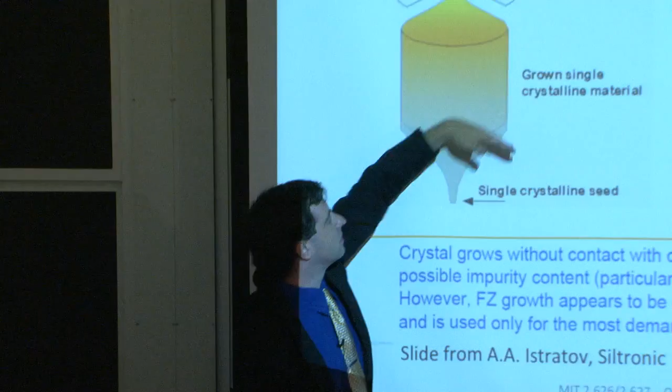And you again start with a seed at the bottom. Your RF coil starts down here, and then the RF coil moves through the material, almost like a comb from the bottom to the top, converting the polysilicon into nice single crystalline material. In the process, it concentrates the impurities in this liquid region. Since the impurities have a higher solubility in the liquid than they do in the solid, they aggregate inside of the liquid region, and again, like a comb, they just get swept out of the material.

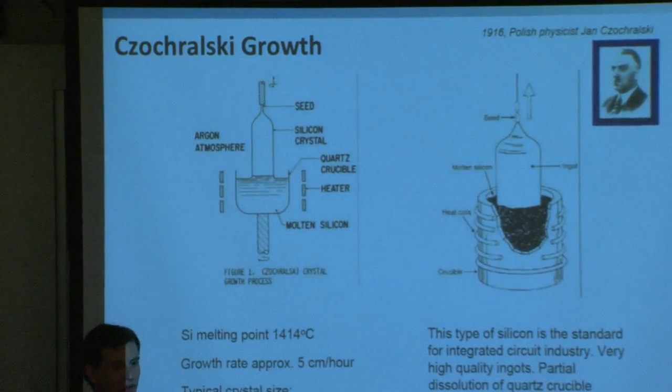Not all of them, but a large percentage. You can make multiple passes with this RF coil to further concentrate the impurities on the extremities and remove them from the material. So that's the float zone method—very expensive material, very high purity. One reason it has high purity is because you don't have this quartz crucible nearby, absorbing or dissolving into molten silicon and transporting oxygen into your crystal. You have much lower carbon and oxygen concentrations typically in float zone material.

So if anybody is doing experiments with silicon for whatever reason, using it as a substrate material, you want to think carefully about what type of silicon you source and from where. You can find some very poor quality silicon out there in the market, especially if you go into the after-sale market, and we know this from some very, very painful experiences. There are some better sources from which to get your wafers, and we're happy to talk about that offline.

So again, with single crystalline silicon covered, we're going to venture into the world of multi-crystalline silicon briefly. First, we'll start with cast material. We have regions of crystalline material with grain boundaries separating adjacent grains. We go into multi-crystalline silicon because it's often a lower cost method of producing a silicon wafer, although you have the grain boundaries.

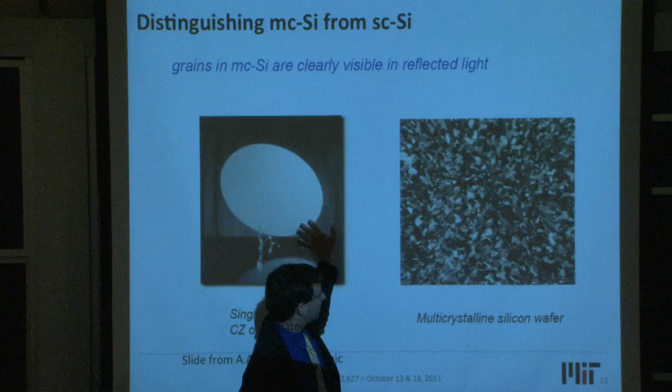So again, single crystalline Czochralski or float zone wafers tend to be round, typically single crystalline. Multi-crystalline silicon wafers tend to be more square-like and visibly multi-grained. So let's talk about those for a minute.

How do you make a multi-crystalline silicon wafer? Again, you'd start with solar-grade silicon, which could come from the Siemens process, the fluidized bed reactor, or upgraded metallurgical grade silicon via the liquid purification route. Somehow you get chunks or granules of silicon with high enough purity to make solar cells, typically on the order of 1 part per million.

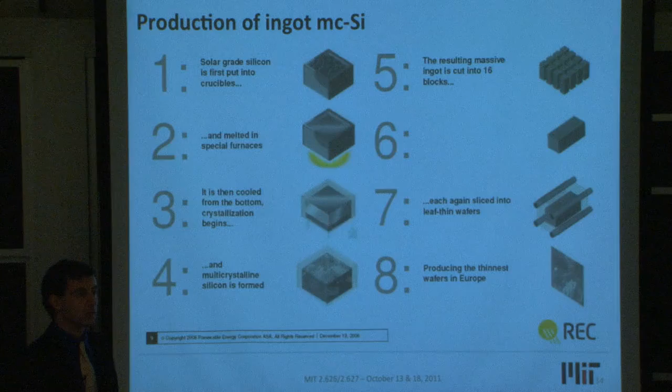So you put your solar grade silicon into a crucible and melt it. Silicon melts at 1,414 degrees Celsius, a very high temperature. Then it's cooled, not randomly, but from the bottom up.

The reason it's cooled from the bottom up is, well, you'll have to come see this after class since it's hard to see from here. This is a cross-section of a small ingot. This is the outside where it contacted the wall. These white flaking pieces are the fused quartz silica that forms the crucible wall, and the silicon nitride coating that acted as anti-stick coating preventing silicon from sticking to the crucible. It's rough and corrugated, but if we rotate it and look at the inside, this is a cross-section of the actual ingot.

If you look carefully, you'll see grains growing from the bottom to the top, though you probably can't see them from here—you'll have to come up after class. This is called directional solidification: solidifying from the bottom to the top, where grain boundaries run perpendicular to the solid-liquid interface, running upward as you grow material from bottom to top.

If you did uncontrolled solidification, with all walls freezing at the same time, you'd have grains growing in from the sides and the bottom. Then when you slice your wafer horizontally, the grain boundaries wouldn't run perpendicular to the surface—they might run parallel, wreaking havoc on minority carrier diffusion length. Imagine being an electron having to travel across that grain boundary between you and the p-n junction. Whereas if grain boundaries run perpendicular to the surfaces, they only affect very small areas of the entire solar cell wafer.

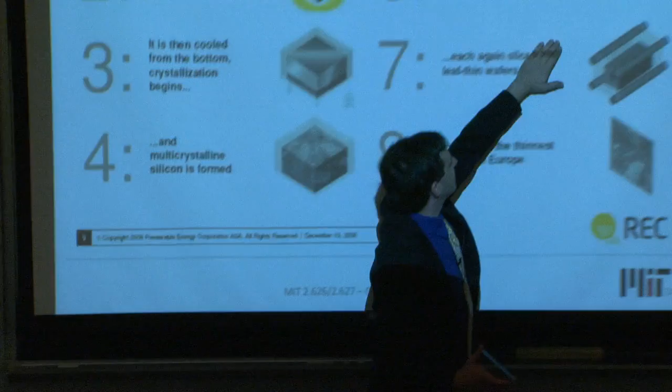So the multicrystalline silicon ingot is formed, then chopped into blocks, usually between 16 and 25—meaning 4 bricks to an edge, or 5 bricks to an edge. Some folks are even exploring 6 by 6, so 36 bricks. Then the bricks are rotated on their side and sliced into wafers, and individual wafers come out, as I showed you right here.

Is this diagram clear to folks in general? Any confusions, any questions? No? How do they cut the wafers?

So this is a process called wire sawing. This is one of the most beautiful technologies because it was invented in the PV industry and transported back, adopted by the IC industry. So it's one of the few examples of a technology that went the other way. Let me get to that point.

How was it done before? It was done by ID saws, for instance, inner diameter saws, that would slice off wafers like a salami. So not a wire, but like a disc saw. Inner diameter meaning your saw is like a rotating blade and you're just using the inner part.

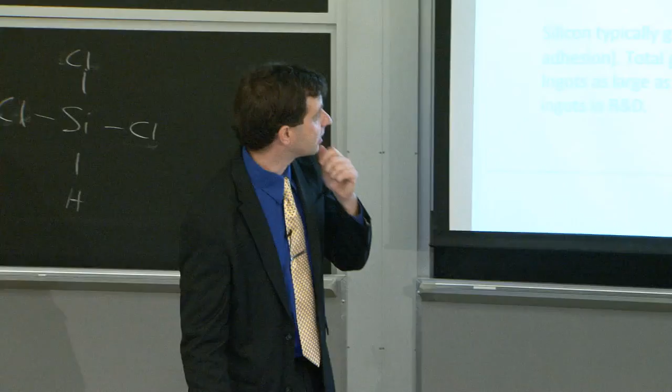Okay, so directional solidification of multicrystalline silicon. This is a cross-section of a furnace that is solidifying an ingot right here. Here's your ingot. This is the liquid silicon, and essentially it's solidifying from the bottom to the top. Hopefully we'll have a tour of one of the world's largest ingot solidification furnace manufacturing companies in the world. So they don't manufacture the silicon, they manufacture the furnace that manufactures the silicon.

That makes sense. No, that would be Vesuvius. Yeah, so it would be other companies that make the crucibles.

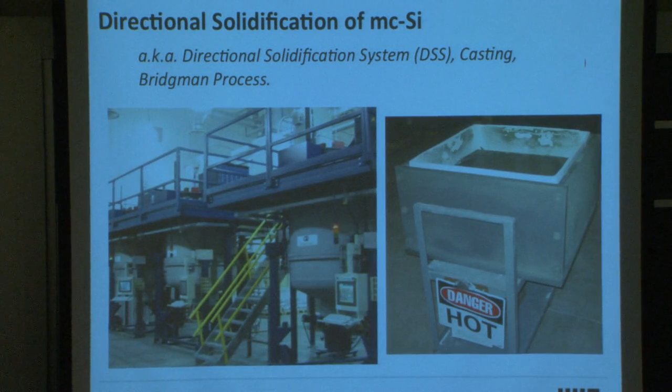And these are some of the furnaces right here, a keyboard and monitor for size comparison, stairs. So they're about 2 stories tall. You can go up here to the top and look down into them. It's pretty cool, using a little infrared lens to block out the heat so you don't get blinded.

And the furnace itself, all the action happens inside of here. The top can lift, or typically they're bottom loaded. You'll see this little seal right here. So this bottom part typically comes down because you want to trap the heat inside of it so you're not losing all that, and the bottom is removed.

The forklift comes in, picks up this ingot and crucible, which could be a few hundred kilograms in mass, up to about 600, maybe even a ton, and removes it and places it in the proper location.

It's a pretty dirty environment. The operator will typically take a garden hose and hose it down inside afterward. It's really the antithesis of an IC fab at this stage right here. These are graphite insulation materials on the sides of the crucible. And this yellowish dust that you see everywhere is silica, again, that nice fine-grained dust that's bad for your lungs.

The directional solidification process can be, to some degree, used interchangeably with the so-called Bridgman process. It's also a name for a specific type of directional solidification.

This is your ingot. This is the ingot chopped into bricks. And then the bricks—here's an ingot coming out of a furnace. Those are the bricks over here. This is a really tiny one, like lab scale. The big ones are over a meter along the long edge.

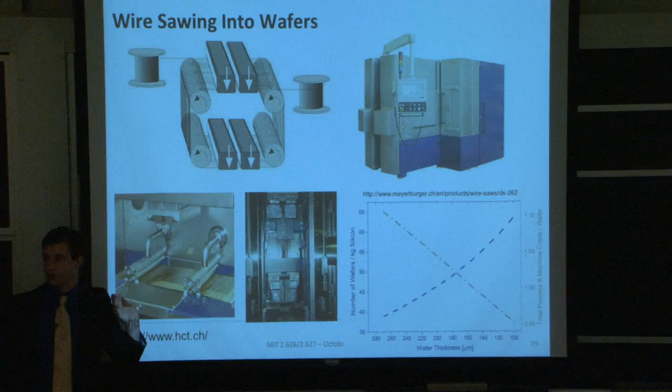And then to saw them into wafers, we use what's called wire sawing. These are several kilometers of wire, one continuous wire, several kilometers long, typically of a steel-based composite, running in these bricks right here, in the presence of a glycol-based slurry typically, and silicon carbide or diamond grit. And the grit is being pressured by the wire against the silicon.

The grit is very small in size, micron size, and it's essentially chipping out small pieces of silicon as this wire is progressing through. Over a period of around 6 to 8 hours, you saw through the entire brick. And you use maybe 4 or 8 of them at a time.

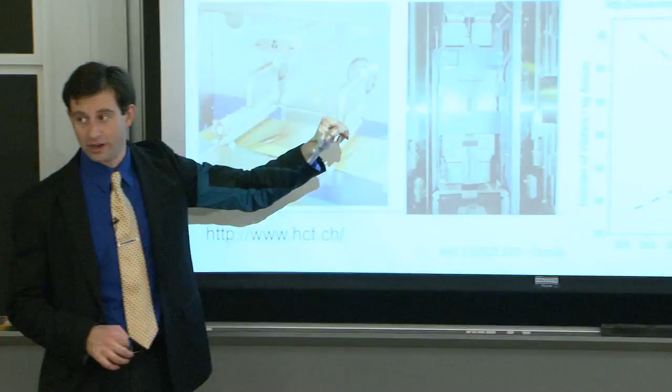So if that wire were to snap about halfway through the process, all those bricks are gone. It's very important that the wire be very robust and able to support the sawing process. As I said, it's several kilometers long and moving at a speed of a few meters per second. So this is zinging along through your material in the presence of very small grit and slurry.

And so the consumables that are used in the wire sawing process are enormous. You lose about half of your silicon due to sawdust in this process right here. So this is a prime candidate for replacement of the manufacturing process, even though it's so commonly used today.

What I'm going to do is give a quick pause right here until our next class, where we'll pick up and talk about ribbon growth, which seeks to get around all of the complexities of multicrystalline silicon ingot growth while still keeping the cost advantage. So with that, thank you.